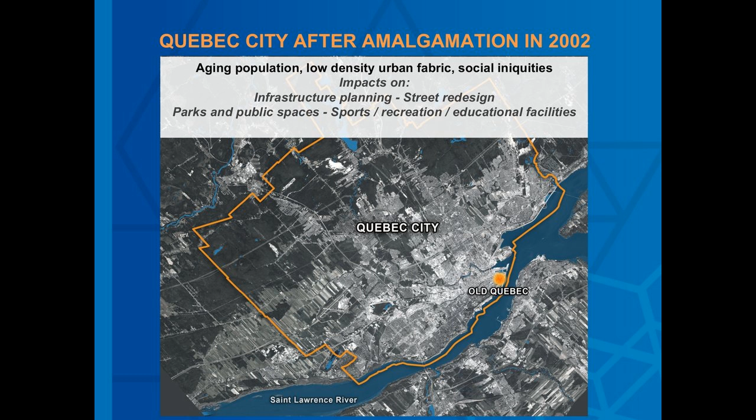So given these realities, how can the urban qualities that we see in and around Old Quebec, that is the human scale, the walkability, and the connectivity among others, be applied to other neighborhoods while at the same time taking into account local identity? So that's why we turn to the Complete Streets approach.

And the major turning point in our reflection came when our host today, Emiko, as she mentioned, helped to explain the Complete Streets approach here in 2016 at a symposium. And in particular, I think what interested a lot of participants was when she explained how cities have the flexibility to adapt it to their own needs and priorities.

As well, at that same symposium, we heard from Gil Peñalosa from the 8 80 Foundation in Toronto, who proposed that if everything we do in our cities is great for 8-year-olds, but also for 80-year-olds, then by default it will be great for all people. And as well, we heard from Jean-Pierre Després, who's a renowned researcher in cardiovascular health and preventive medicine at the Quebec Health Alliance, who launched a call for action, for getting people up and moving about the city.

And I think one message that united these presentations was simple. We're all working toward the same objectives for improving our urban environment, but it's essential, absolutely essential, to break down silos to facilitate information sharing.

So to that end, an interdisciplinary working group was formed by the city to develop a shared vision for a comprehensive and systematic approach so that we could rapidly and accurately assess the potential for creative, inclusive, dynamic, and safe streetscapes. And the vision that was agreed upon for defining those priorities was how we could support and improve citizens' well-being and quality of life, which must be placed at the center of the decision-making process.

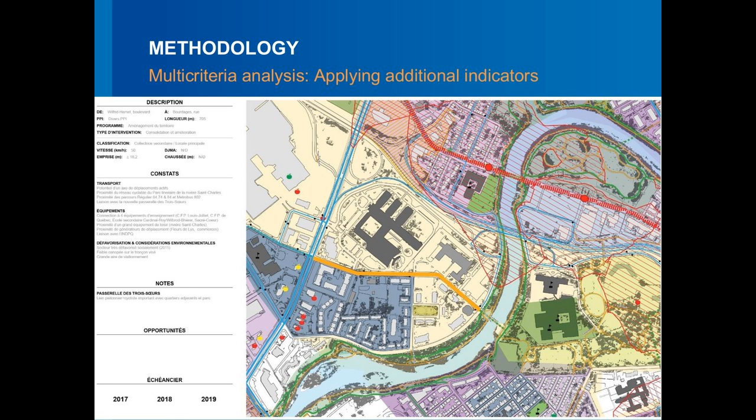Concerning public input into this process, to date, 3 public consultation tools have been developed and are used either individually or in combination with one another, according to the complexity of the design and/or community issues. So what we find is that by crossing the multi-criteria analysis with the performance criteria and those related to sustainable health, we feel that the results offer stakeholders a thorough portrait of a street's potential. And what is interesting is that software had never been used for identifying priorities for streets and public spaces as proposed here.

So between an existing street and an ideal street, what we find is that often the right-of-way is insufficient to accommodate all of the components that may be identified or hoped for. So that's where these various design filters come into play, which allow us to define options for residents so that the final design, the improved street, best responds to their expectations and needs.

Since initiating the study in 2015, we've undertaken several pilot projects to validate and improve our methodology. I'd just like to show you a few examples of streets that were designed using this approach to show just the range of possibilities that can be planned for using this process. In the case of the Rue du Pont, it's in the Saint-Roch neighborhood near downtown.

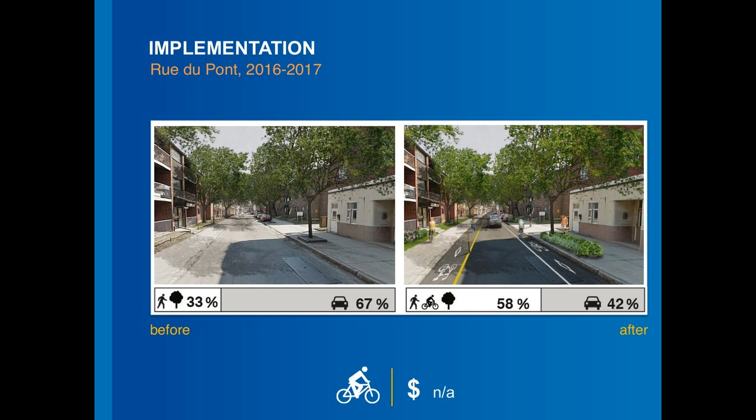And since then, for example, a new bike counter has been installed in 2017, which confirms that there's been a fourfold increase in the number of cyclists along the street. We have now up to 1,000 per day using it during the peak summer period.

Second project is St. John and Turnbull Streets, and here pedestrian safety, increased vegetation, and the addition of bike lanes were requested by the population in an online survey and confirmed in a public design workshop. These investments represent an increase of only 4% of the total budget, but I think demonstrate that substantial improvements are possible with minimal financial impacts when they are defined early on in the process.

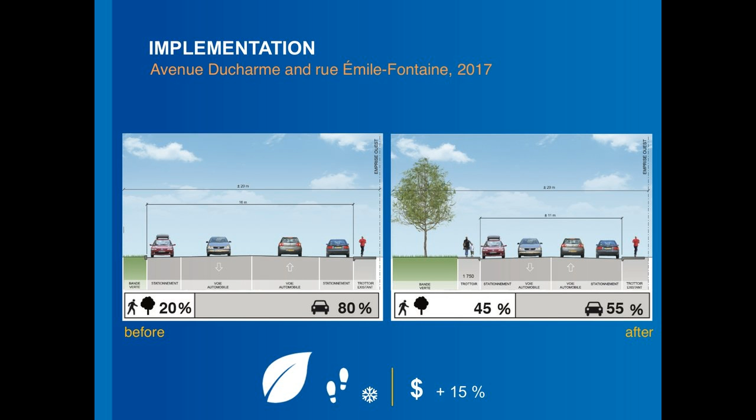As well, there have been substantial savings for our Public Works Department in snow removal costs. And with this recuperated space, we added a second sidewalk, which links up schools, parks, and a daycare center. And we also have been able to plant 50 large-scale trees, mostly elms, in this recuperated green space.

In the case of the Chemin de la Canardière, which is also nearing completion, here what's interesting is that a new public square was built after the design had been tested over several years in the context of a tactical urbanism project. We've added bike lanes and nearly 100 trees have been planted. Widened sidewalks are obstacle-free and in many parts are textured for the visually impaired.

And the intersection seen here has been raised to sidewalk level. So we've eliminated a frequent source of accidents for pedestrians in winter. It also contributes to a reduction in automobile speed and is designed as an extension of the new public square. What's also interesting here is with these changes, the space reserved for pedestrians, cyclists, and greenery has increased from about a quarter of the right-of-way to nearly half.

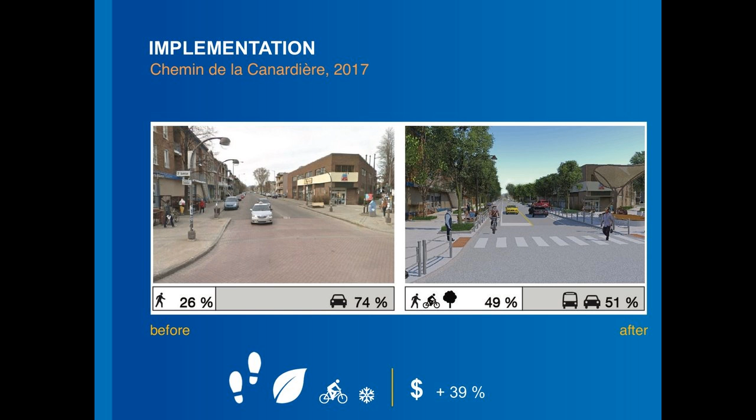And the Route de l'Église is one of our major street design projects for the next several years. It's located in the suburban neighborhood of Sainte-Foy, which is also a post-World War II suburb. Priorities here include on equal footing improvements to pedestrian and cyclist comfort and safety, as well as the addition of greenery. Once again, the sidewalks will be significantly widened. They will also, of course, be barrier-free. And we will be building a bidirectional bike track, which will be separated from automobile traffic by planting strips.

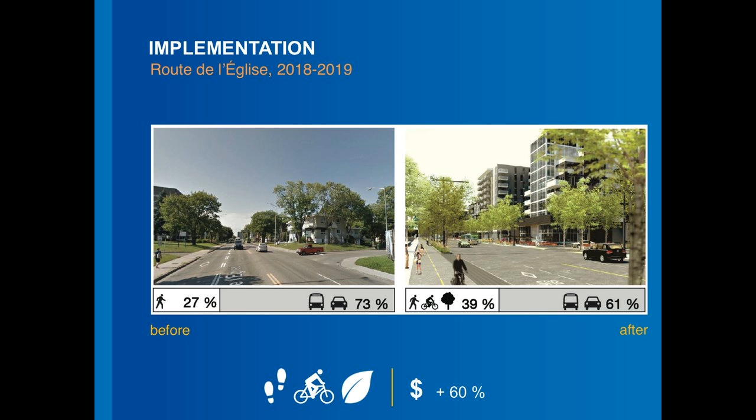In terms of greenery, this design allows us to plant approximately 170 trees and will also allow for about 1,000 square meters of shrubs and perennials, which will allow us to increase the tree canopy here from about 9% to nearly 40% of the right-of-way.

And finally, we are currently working with consultants, residents, and business owners to see how we can improve comfort and safety of pedestrians and cyclists in and around the historic center. And a major challenge here concerns sidewalks, because of snow and ice accumulation, seen here in the upper left, they can become practically impassable in winter.

As well, drivers along local streets have difficulty with short-term parking needs and are often forced to jump curbs and park on the sidewalk. So the strategy that we've adopted for local streets includes placing the stormwater drains in the middle of the right-of-way and connecting downspouts directly to them to evacuate water as quickly as possible.

In addition, sidewalks are lowered to create, in essence, a form of shared street. So because we've diminished or limited the level changes along sidewalks, there's also improved safety for pedestrians, especially for those with limited mobility. The streets where this design has been completed and the other streets where it may be applied are examples of those which were relatively low in the multi-criteria analysis that I showed a little earlier, but they still offer interesting opportunities to better adapt all streets to the needs of local residents.

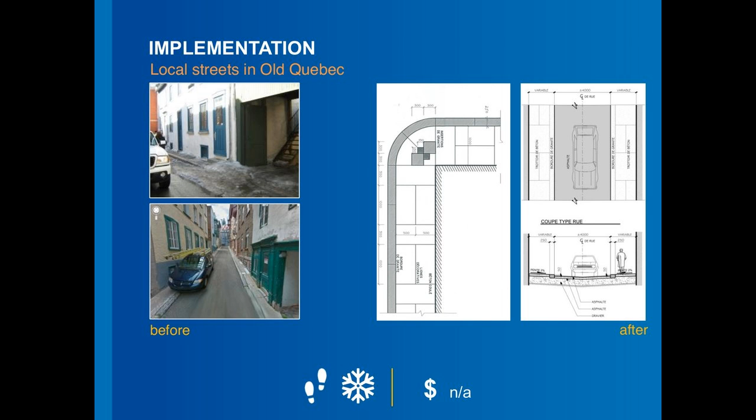So just to recap, in terms of improving the quality of the service to the population, we find that this new complete streets approach, which is designed around data-based decision-making, helps us create a process which is more transparent, rational, and equitable for all residents. In addition, we find that as a visual planning tool, it helps us rapidly identify and communicate design priorities and issues to all stakeholders, which also contributes to increased efficiency throughout the process. In many cases, we see savings in the planning and design processes of between 6 and 9 months, and even in some cases up to over a year.

And while it is important for us to keep a citywide vision for improving living environments, it also allows us to remain sensitive to local identity and needs. So it allows us to apply it in urban as well as suburban environments, and we can also adapt it to existing, but also, even more importantly, to new street design. So this new complete streets approach, it's still a work in progress. Further testing and adjustments will likely be needed before a full rollout is completed in 2019.

But maybe I would suggest that beyond improvements to the street planning and design processes, perhaps the most important contribution of this approach is that it has helped put all stakeholders, citizens, city professionals, elected officials, all on the same page by raising greater awareness of the importance of streetscapes to the quality of our urban environments and the quality of life in the city. So it's basically helping us to place our efforts in the right investment at the right spot at the right time. So thank you very much.

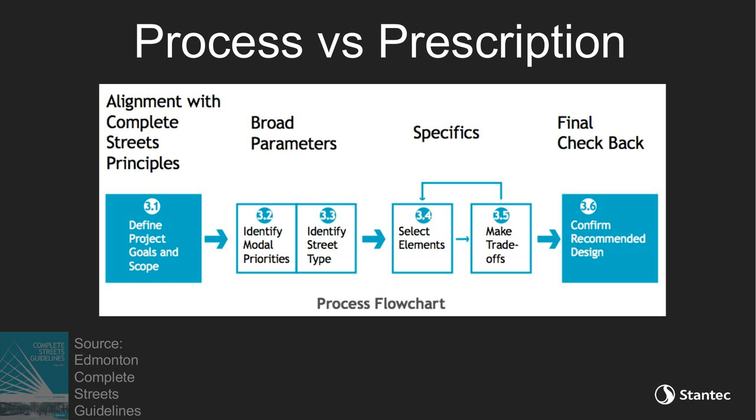We can't have an extremely wide right-of-way. We want to keep things tight, and we want to be smart about how we use things, so we need to make trade-offs and have discussions about that. So it's going through the process rather than being prescriptive and providing blanket statements or blanket cross-sections to our environments in terms of how we want to change. So that was one of the guides that we were involved with.

What we do a lot of times, just bringing it back to the Canada idea, is think about Complete Streets not as a complete box of hockey cards or a complete box of baseball cards, if that's your thing. You don't need to have all 445 cards in order to make a complete set necessarily when we're talking about street design. What we're talking about is making sure that we have different elements, and it's a network approach, and it's about the trade-offs that you're making within the fabric of the urban environment, rather than about providing something for everybody in one single cross-section. Otherwise, the cross-section gets unwieldy.

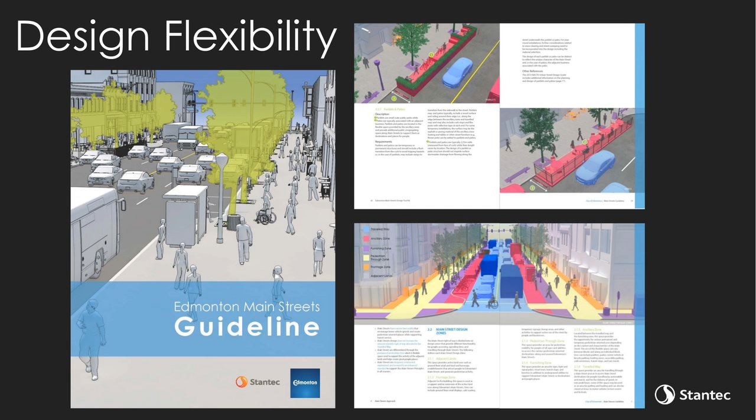So another thing that we were involved with, with my colleague Tyler Gawley up in Edmonton, was the Main Streets guidelines, which looked at design flexibility and different ways that you can use parts of the street to have, say, parklets for example, or provide different amenities based on the context and even just the adjacent land uses. This idea is really important for designers and admittedly might be a little bit uncomfortable too, to have this type of flexibility, but understanding that you can change and adapt within your city and within different contexts is really important to make sure that we have human-scaled designs.

Another project that Stantec was involved with, with WSP, was the rewrite of our national guidance. The last time it was published by the Transportation Association of Canada was in 1999, and a lot has changed, obviously, in the world, and especially within transportation practices. There's been a lot more research and a lot more understanding in terms of what people need and how we move about. So in 2017, the new guide was published this past summer. And using bicycles as an example, there are a number of different elements that have changed, but the bicycle section of this national guidance really highlights what the big change in my mind is.

It's changing from this idea of bicycles as vehicles, or the idea of how do we move these tools, regardless of maybe transit, might be cars, to how do we move people riding bicycles around. So it's a human-centered focus and a user-centered design. So there's human beings and there's stuff between their ears that is influencing their decisions and making them feel comfortable or uncomfortable. And so the design process around that is now encapsulated better within our design guidance.

And we can see that in some of the recommendations and the things that we're able to have within our streets. Also a big focus: before it was on rural roadways, and now, with a lot of transportation occurring within urban areas, and most of our population living within urban areas, that focus is now occurring.

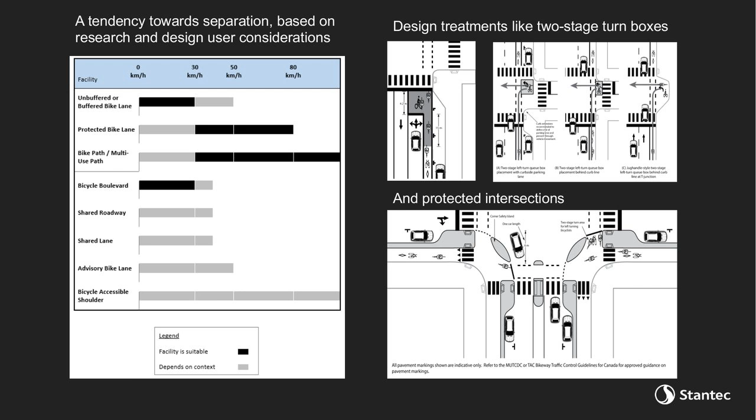There's things like two-stage turn boxes, which weren't dealt with before in past guidance, and even protected intersections, which I find is pretty awesome to have within national guidance, to be able to talk about the design of these and using those treatments that we've seen elsewhere now within Canada.

Another thing about complete streets in Canada is we always hear about how everything's cold and everything's snowy. And some people may use that as an excuse, but I think more of it is it's just a design consideration. So it's just a thing that you need to think about when you're doing your design.

An example, for the skiers out there, thinking of a blue run, so a pretty moderate ski run. It's accessible to many people, but if you leave it unmaintained, moguls start to appear, and so these bumps on the hills are now things that you have to move around, and you can play with them too and have fun with them if you're a mogul person. But it quickly makes this blue run that used to be accessible to many people only available to a select few, and it might be the people that are more willing to take more risk.

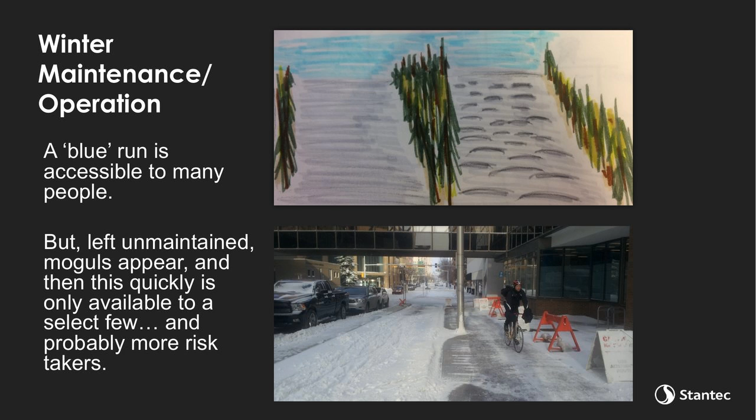Also, what we've noticed when we've done some designs in Calgary and in Edmonton in particular recently is thinking about the design vehicle. So the size of the bicycle, so cargo bikes or bikes with trailers are something that is important to think about, but also think about that maintenance equipment that's going to be going down, say, your protected bikeway. What is the width of that, and what does it need to be accommodated?

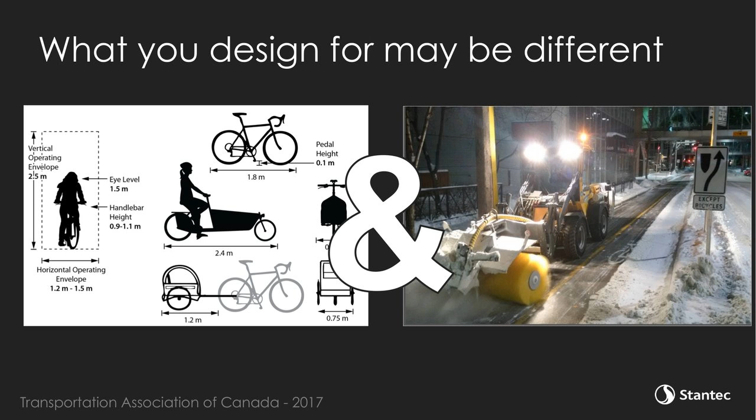A lot of times that's actually what's dictating our designs, instead of the width of the operating envelope of a person riding a bike, because it might be a pickup truck with a sweeper or a plow on the front of it. And so that will dictate the designs, and making sure that you have good operations and those maintenance considerations baked into your design is important, so that you can keep your infrastructure rolling out into the future, and it's not seen as a hindrance.

What we've also done, and I'm going to give some examples here, is show this value to the citizens and the people that you're creating these designs for through the use of rapid implementation. So two examples that we have.

Recently, we were helping the City of Edmonton, and then the City of Edmonton took it upon themselves to design and implement an entire grid of separated bikeways into their downtown, and it fills the central gap into the heart of Edmonton, and really gets people to be able to experience their city in a different way than they had before. If you're a musician, you then choose to obviously play a trombone on your bicycle, but you have kids that are now feeling comfortable because it's almost an extension of the pathway system, for example.

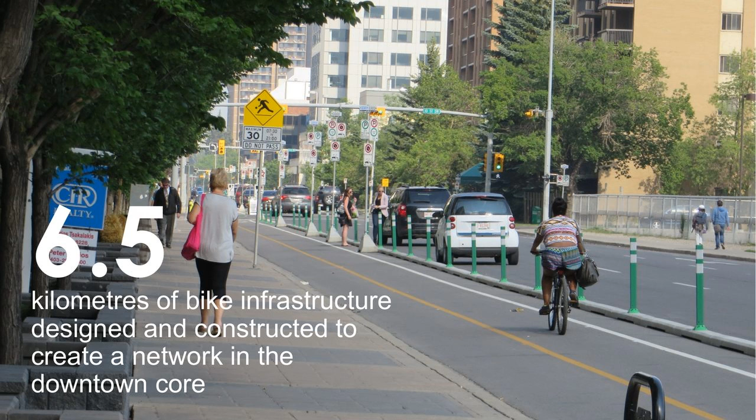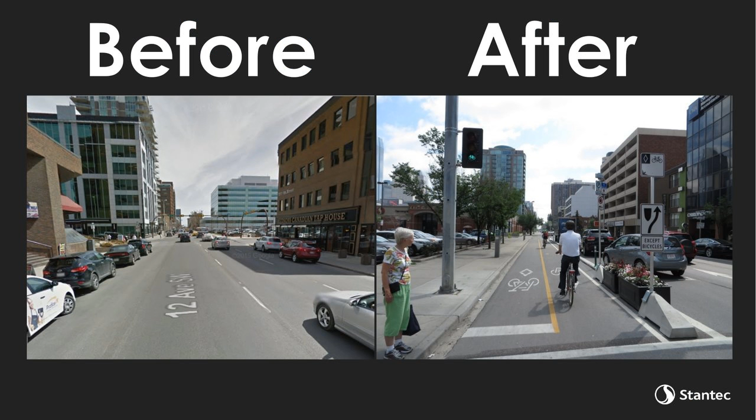It is a smaller network, as my colleague Tyler likes to point out, but we did help pave the way, as I like to push back at him. And this is what it looks like, the before and after. So these big streets, it's either scooting a travel lane or a parking lane over in order to create this space. And then it was night and day from when this was implemented, the human aspect of it.

And you do have then families taking their children downtown because it's an extension of the pathway network again, and you can explore your city. And I've taken kids' school classes down to explore it. I've seen a mom that was teaching her son how to ride his bike on this network even. And the use of engagement.

So engaging people. Sometimes this is a nuanced approach I find between the U.S. and Canada, or even just Canada and other places too. And it certainly varies within Canada. But the level of engagement that you want to do with stakeholders and the public in order to field information and insights into what you're trying to design.